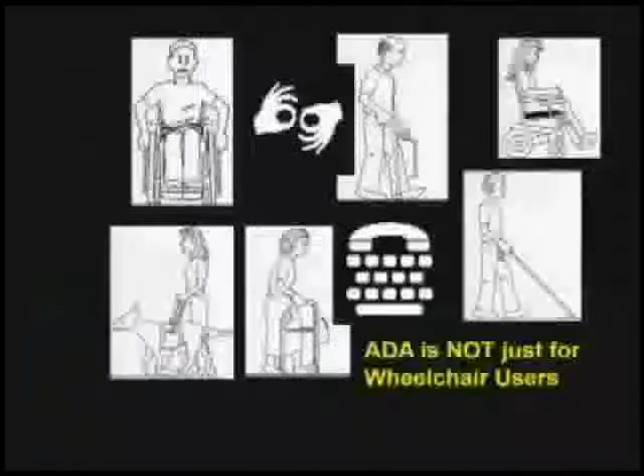The ADA is not just for wheelchair users, walkers, crutches, and canes, people who are visually impaired, hearing impaired, vertically challenged, or even those with arthritic hands. It covers all kinds of disabilities dealing with accessibility, so it's not just chair users. Chair user spaces are probably one of the bigger impacts, but again, not just that.

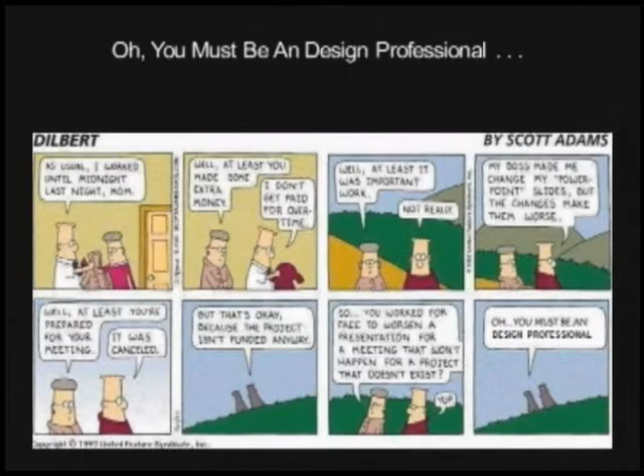Let's talk about my good friend Dilbert, talking to his mom. 'Well, as usual, I worked until midnight last night, Mom.' 'Well, at least you made some extra money.' 'I don't get paid for overtime.' 'Well, at least it was important work.' 'Not really. My boss made me change my PowerPoint slides, but the changes made them worse.' 'Well, at least you're well prepared for your meeting.' 'It was canceled. But that's okay because the project isn't funded anyways.' So you worked for free to worsen a presentation for a meeting that won't happen for a project that doesn't exist. Oh, you must be a design professional, i.e. an architect, and I know you've all worked on that project. Hopefully this presentation will help make sure this doesn't happen to you.

Now, compliance with the ADA. ADA is not the American Dental Association, even though you might Google it and find that. We're talking about the Americans with Disabilities Act.

In dealing with accessibility, one of the places you can go for technical assistance is the Access Board. Great website, a lot of good information there. They have a technical assistance number, 1-800-USA-ABLE, where you can get technical assistance.

They're only going to give you technical assistance on the ADA, not the Florida Accessibility Code. They don't know the specific details about the Florida Code and our specific challenges here in Florida, but they'll talk to you about federal requirements, which might give you good insight. Look at their website for clarification and information.

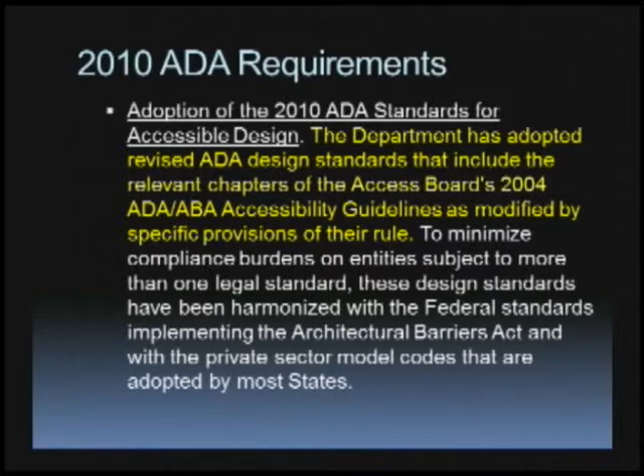ADA facility compliance affects new construction, alterations, barrier removal, facilities for existing facilities. So in dealing with that, you need to look at the requirements for the Florida Accessibility Code. The 2010 ADA requirements, the department has adopted the revised ADA design standards and added to them for accessibility. So the important part is March 15th, 2012, we have a new ADA and we also have a new Florida Accessibility Code.

This presentation is really going to be based on the requirements of the Florida Accessibility Code and their requirements. We're going to be bouncing back and forth a little bit with some things for the ADA, so you're aware of it if you're practicing outside of Florida, but we're going to be looking mainly at the Florida-specific items.

There's a new format on the 2010 ADA standards. If you've been using ANSI A117.1, you've seen that new format. In Florida, it's a totally whole new piece. So we're dealing with that. The old Florida code, like Section 464 dealing with parking, that's no longer the same. Parking is in a whole new section. So be aware, new section numbers, you're going to need to change all your references as it relates to pieces of the Florida Accessibility Code.

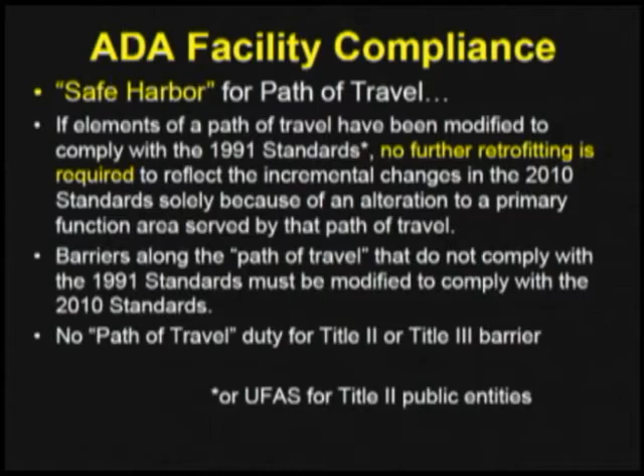Again, if you met the '91 standards, no further retrofitting is required to reflect the changes in the 2010 standards. New construction meets the ADA standards and the Florida Accessibility Code. Alterations meet the new construction standards to the maximum extent feasible, and the path of travel requirements can expand the scope of a building project.

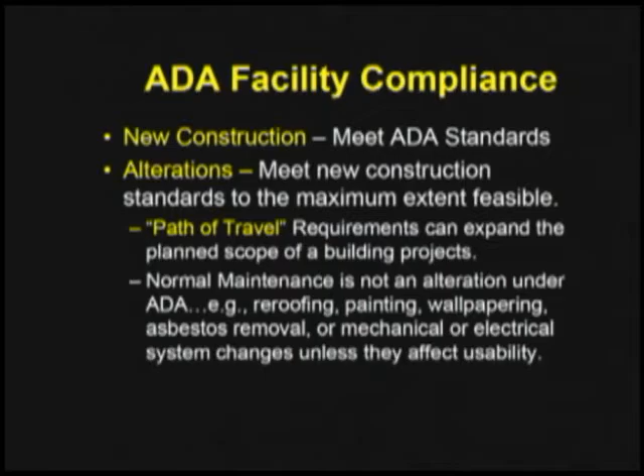The biggest issue we see all the time is people doing an alteration to a building. There's a thing called the 20% rule, and people forget that 20% of your alteration needs to be spent on accessibility compliance. So when you're doing a project in Florida, you've got to think about your alteration, and then think about what you're doing for accessibility. We'll talk more about that later.

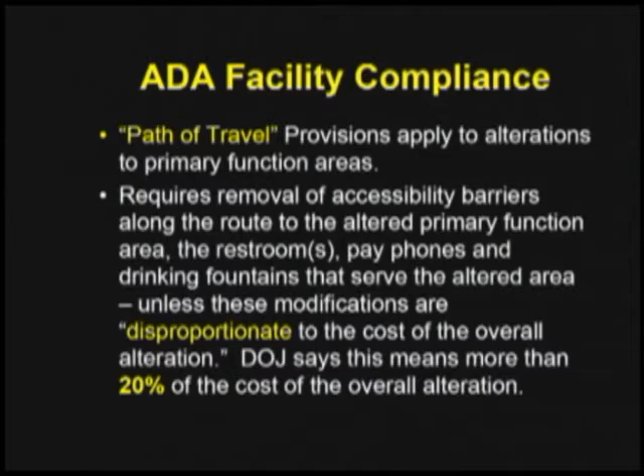The path of travel, and here's that disproportionate cost I was just talking about. DOJ says that means more than 20% of the cost of the overall alteration. So let's say your client tells you a project is going to cost $100,000. You need to tell that client, wait a minute, 20% of that needs to go toward accessibility. So maybe your project isn't $100,000, it's $80,000.

20% of 80,000 is 16,000. There's 80 and 16, that gets you to 96,000. You just saved your client $4,000. See if you can split it with them, maybe work out a deal and get some bucks out of it. But be careful about this alteration and the 20% requirement.

The path of travel is a continuous, unobstructed way of pedestrian passage by means of which the altered area may be approached, entered, and exited. This also includes, for these alterations, restrooms, payphones, and drinking fountains serving the area.

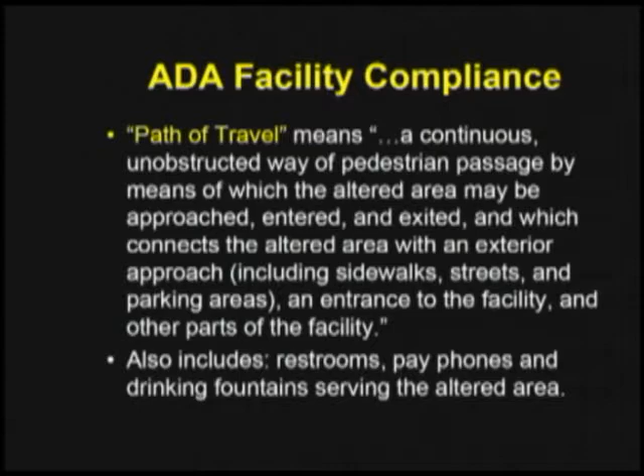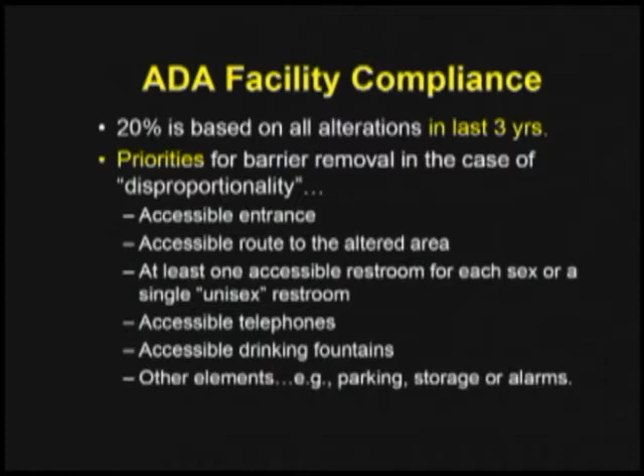20% is based on the alterations in the last 3 years. There's a recommended priority in dealing with this. Basically, look at it this way: get me into the building, provide me access to goods and services, and let me get to the bathroom. That's usually your path of choices, and that kind of makes sense. So they talk about accessible entrance, accessible route, at least one accessible restroom, then telephones, drinking fountains, and other elements. Main point: can I get into the building?

There's a declaratory statement in the state of Florida on this specific issue that says if I'm doing an alteration to a tenant space in an office building, only the tenant space is required to be made accessible. I don't start looking at the common area bathrooms. I don't look at the elevator if it's a multi-story building. I don't look at getting into the building. I just worry about the tenant space.

Landlord-tenant, very important issue. And like I said, there is a declaratory statement issued by the Florida Building Commission to address this issue and clarify it if you ever run into this problem with a building official here in Florida.

Service animal, I just had to throw this in there because I couldn't believe it. I found this interesting. Service animal basically before meant almost anything. I've actually been on a flight where a woman had a snake as her service animal. She preferred it, it made her feel comfortable. She would get a little nervous on the plane. She got nervous on this flight, so out of her bag she takes the snake and wraps it around her neck. Now the guy sitting next to her kind of freaks out.

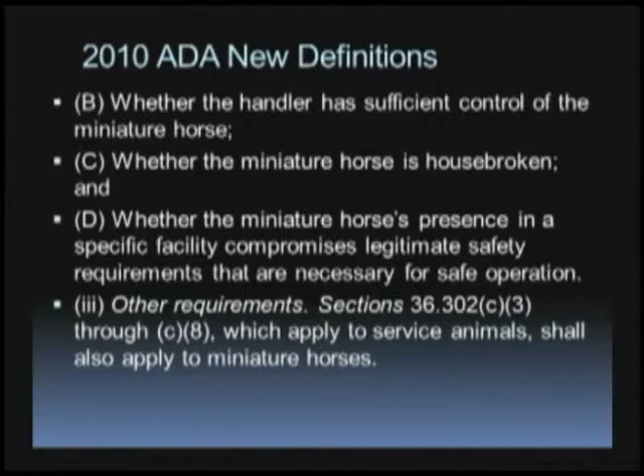Here's the Florida Accessibility Code for Building Construction. This is the binder for the book. It says 2010, but in reality it's the 2012 - this guy right here. Now, I printed this out myself, that's why you see it. But I want you to be aware of the fact that it is a 2012 Florida Accessibility Code. That's what you're dealing with. It happens to be in all the binders of the 2010 Florida Building Code.

In dealing with all of this, the 2012 requirements have some exceptions from the federal standards. There used to be about 17 items that are Florida specific, above and beyond the federal requirements. What we were able to do during the process of upgrading to the new 2012 is we dumped over half of those, and we've cleaned them out a lot. So there are certain ones that are important for the disabled community in Florida, and these are some of those.

The exterior door still stays in Florida at 8.5 pounds. Okay, that's still an issue that's still out there.

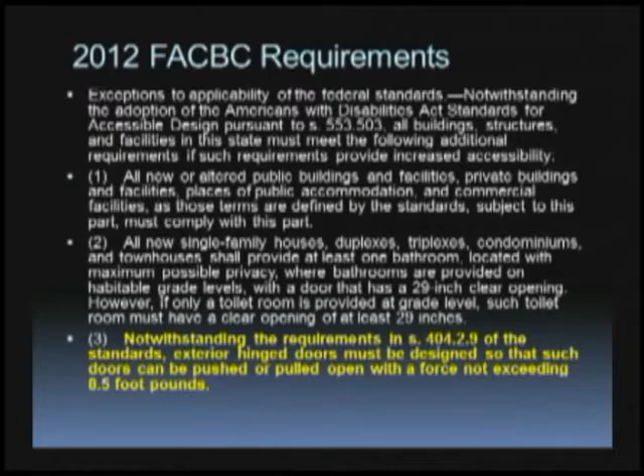In hotels and motels, the number of rooms equaling at least 5% of the guest rooms - so 5% of the guest rooms under Florida law are required to be made accessible, and these are the only 3 items that deal with those requirements: grab bars, all beds open frame, and we've changed this. It used to say a water closet that you provide a donut, which is a raised seat. The problem was you could never find it. So when we were working through this process, we agreed just put in a high toilet. So what you're going to put in is one of the accessible toilets 17 to 19 inches above the floor. And that's above and beyond the base requirement for accessible rooms.

In bathing rooms and toilet rooms, in new construction - and this is really important to know - in new construction you are required to put a lavatory in the accessible toilet stall. It's not required under an alteration because the law specifically says new construction. So you've got to put that lav in the stall.

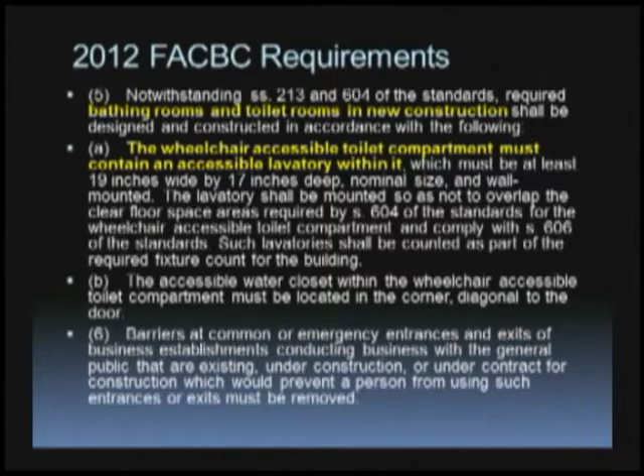The other part to let you know: when you weed through the Florida Accessibility Code, you'll see if there's more than one fixture in the accessible toilet stall, you need to have one accessible fixture out in the common area. Guess what that means? You will be providing an accessible lavatory in the common area. Now most plumbers and installers are starting to make all the lavs at 34 inches, so it's not a big deal, but it's your apron - you got to be careful about your apron in the common area. So be aware of that one coming up.

The toilet also needs to be diagonally across from you. Can't put it in front of the door unless you've got a really big room. But if you take a typical stall that you're going to create, it needs to be diagonally across so you can get in there and maneuver around. Another important part dealing with that, because there are 2 fixtures in the accessible toilet stall, the code now says you need a 5-foot turnaround inside that stall. So just be careful, that can catch you if you're not careful with it.

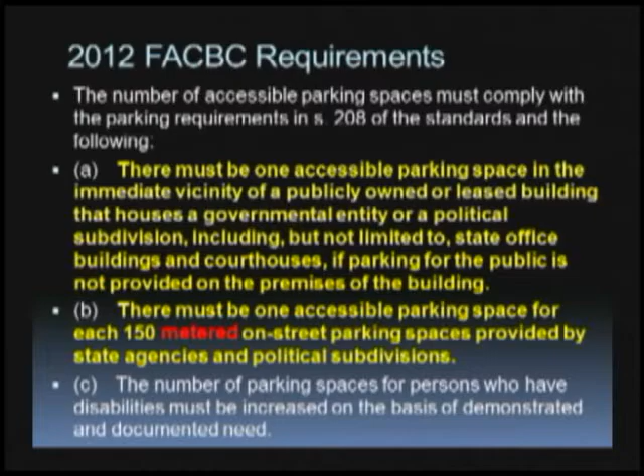There must be one accessible parking space in the immediate vicinity of a publicly owned or leased building, and one accessible parking space for each 150 metered on-street parking spots.

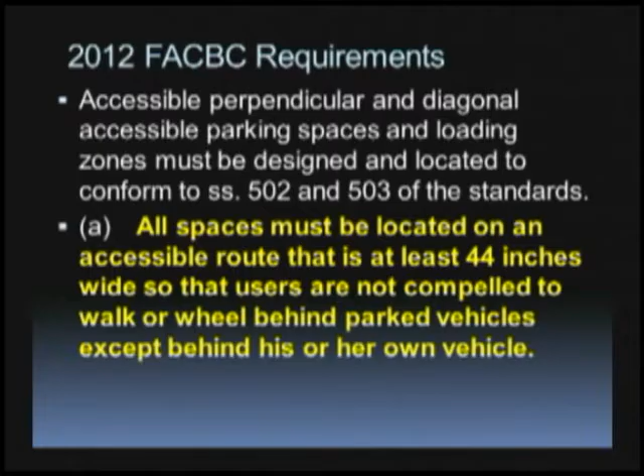All spaces must be located on an accessible route at least 44 inches wide so users aren't compelled to walk or wheel behind parked vehicles. We added text saying except behind his or her own vehicle. There was always a debate, but we all knew it meant you can go behind your own car, but not behind another person's car. We tried to get two cars done in the process, but it didn't work out, so this was the compromise.

So basically, from the parking space to the front door, you need a 44-inch path to travel, an accessible route that's at least 44 inches wide. That's what you're going to have to be doing here in Florida.

Florida's parking spaces are a minimum of 12 feet wide, and you need a 5-foot access aisle. You don't need the van accessible parking sign in Florida for accessible parking spaces that are open, because guess what, they're all van accessible. What's a van spot under the ADA? 11 and 5, 16 feet. What's Florida's? 12 and 5, 17. Therefore, they're all van accessible, and there's no requirement to provide the van sign because they're all going to be accessible.

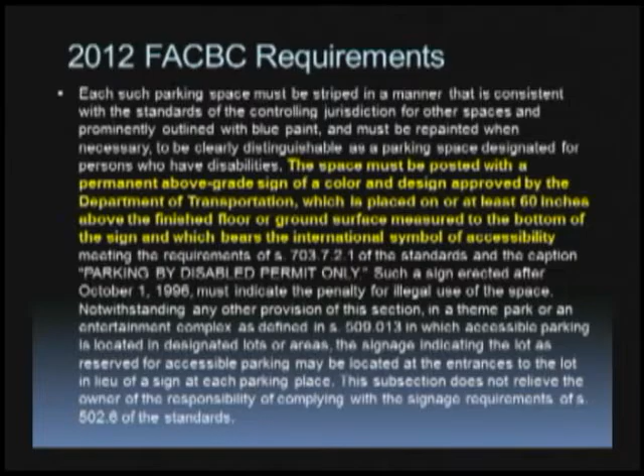The space must be posted with a permanent above-grade sign. Florida's code used to say 84 inches, but we've changed it to harmonize with federal law. It's now 60 inches minimum to the bottom of the sign. One of the processes in eliminating a lot of these things in the Florida statute was trying to harmonize the Florida Accessibility Code with the federal requirements.

The removal of architectural barriers from a parking facility in accordance with 28 CFR must comply with this section unless compliance would cause the barrier removal to not be readily achievable. So we put that in dealing with parking, because you're dealing with existing facilities and might have a problem getting things to work out. Sometimes that means you do what's readily achievable.

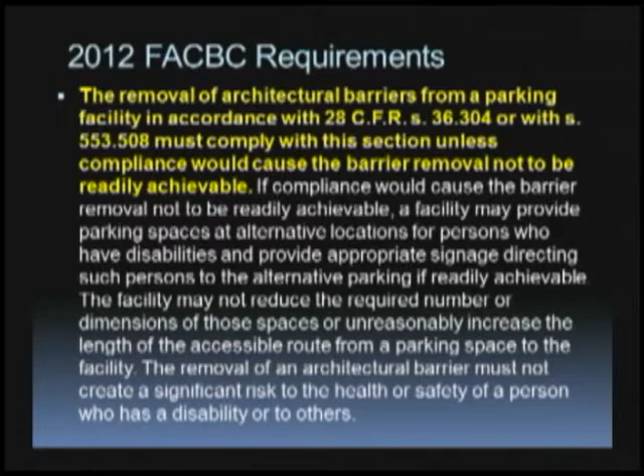An example I can give you is parking close by might have too much slope, but if you go across the driveway, it could be flat. Now I've provided accessible parking. It's not right by the building, but that's a readily achievable solution versus tearing up a parking lot.

A facility making alterations under 553.507, part of the Florida statute, must comply with this section to the maximum extent feasible. In other words, when dealing with alterations, you're doing the best you can. That's right from the statute.

If a local jurisdiction says, okay, we like our parking spots 15 feet wide with a 6-foot access aisle, wrong answer, because the statute expressly preempts the establishment of handicap accessibility standards to the state and supersedes any county or municipal ordinance. So the Florida Accessibility Code is a mini-maxi code. No local jurisdiction can add to it, and no local jurisdiction can take away from it.

Some people might say they want certain things a particular way in their area. No, Florida Statute 553.513 says this is it. This is all you do.

This was a part that has already passed, we've already dealt with it, so we won't get into it. But basically it was saying you could use the 2010 ADA until March 15th if you wanted to do that for a project.

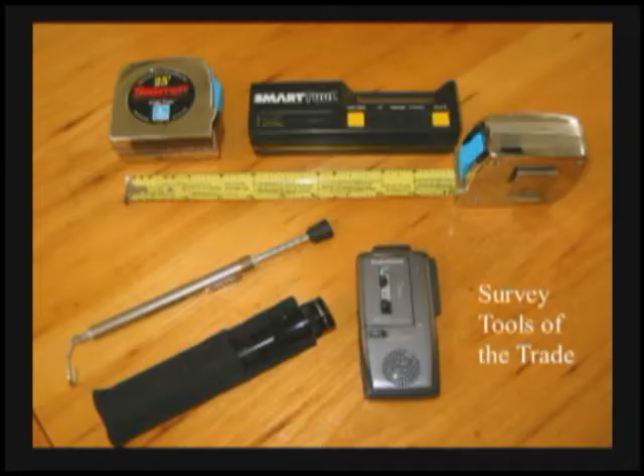Tools of the trade, some basic things. There's an ADA tape measure out there that has the entire accessibility code on the tape, if you want to get one of those and have lots of fun. I stole from the old school - I've upgraded this, I no longer do tapes on the micro cassettes because you can't buy them anymore, so I've now gone to a digital recorder. It's interesting, I went to replace the tapes and they said no, nobody sells them anymore. They're still out there, but you got to find them.

And the smart tool, which is the leveling device, take a look at it. So things you need to do if you're dealing with accessibility: you need a tape measure at least 25 feet long, so you can measure the parking spots. The leveling device, the smart tool, buy the 24-inch one - that's what the feds use, that's what everyone, all the documents they publish, say buy the 24-inch one, calibrate it, and set it up.

The crazy part - I've actually had people dealing with this, and I want you to know it solves the debate in the field real quick. I've actually had a person do this to me: gone out to the field, kind of rocked back and forth, and said, this feels about 6.7%. How do you do that? You got something on your ankles? Take the smart tool, it's out there, it's done.

The door pressure gauge, the last time I looked at it, the price was 30 bucks. That's for pushing and pulling on a door. It's the best one out there that I know of. A lot of people use fish scales and stuff like that, and obviously a digital camera - take pictures. With today's technology, pictures are the best thing, you can see everything you need to know.

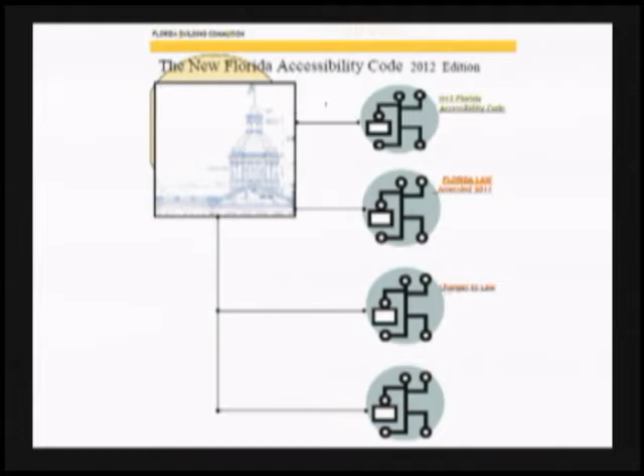This is the web page, if you go to floridabuilding.org - www.floridabuilding.org - this is the web page that you get to, and if you notice it says 2012 Florida Accessibility Code, Florida law, the amended law, and they have a little paragraph in there about the changes in the law. Some good information for you if you want to go looking at that.

The equivalent facilitation - there's still a part in there that you can say, what's equivalent? Nothing in these requirements prevents the usage of designs, products, or technologies as alternatives to design, which is what the building codes always had - alternate design solutions. So you can go to that.

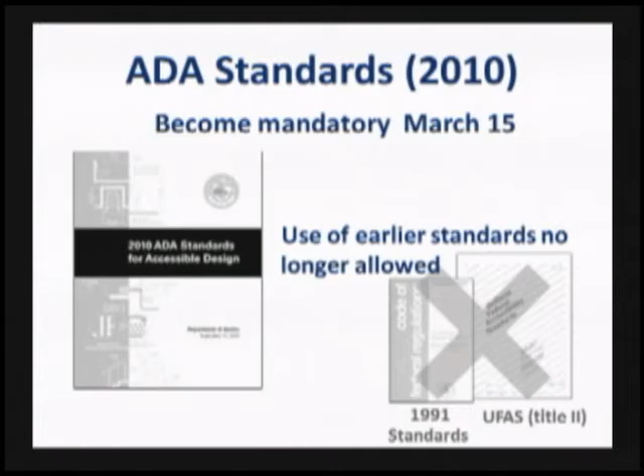Let's take a look at specific things in the Florida Accessibility Code dealing with it. Again, we talked about it - we got the old books that came out, we got the 2010 ADA standards, which is the basis of the Florida Accessibility Code, and it all became effective March 15th. So dealing with that, you're dealing with the building permit date. Here we are at this point in time, we're already past that date, so everything should be dealing with that code section.

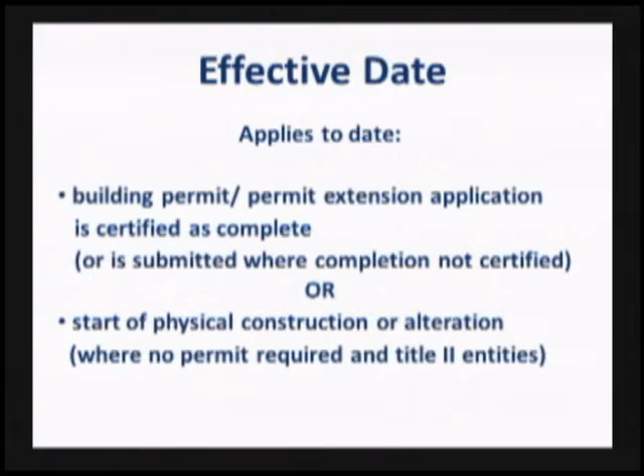The additional DOJ added requirements to the 2004 Access Board's guidelines: social service center establishments, housing at places of education, assembly areas, medical care, residential dwelling that's covered by the ADA, detention and correction facilities - so those of you who do get incarcerated, you will know you will have an accessible stall and cell to be in if you want to get there. And they've clarified some things about places of lodging.

The ADA standards are for DOT. DOT has done their own standards - they've taken the federal ones and they've added to it. As an example, under the new Florida Accessibility Code, there is no requirement for detectable warnings. They're gone.

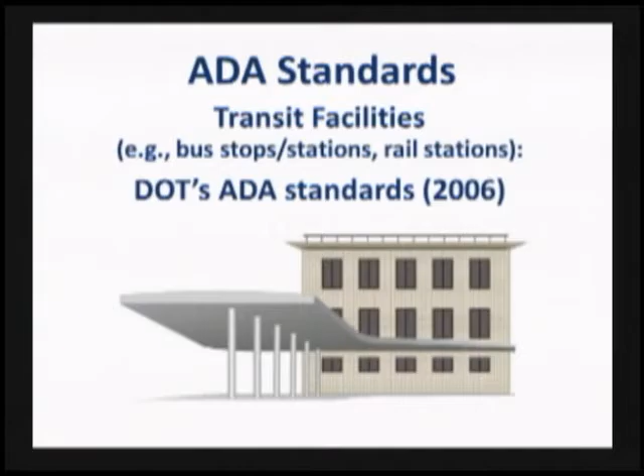Detectable warnings are now gone on private property. Folks, we've been putting them up all over the place, in places they should not be. DOT has said you will provide detectable warnings on roadways and streets. But once you turn off the road and go onto the property, guess what? No more detectable warnings.

As we mentioned earlier, the harmonization between the International Building Code and ANSI, keep going. We're obviously into a newer version of the International Building Code, and that's coming up with the newer versions of the ANSI standards. There is a side-by-side comparison, if anyone was curious, with the new ADA, the DOJ, and the IBC. If you want to download this, I promise you, if you start reading it, it's a good thing to help put you to sleep. We'll put you right out real quick.

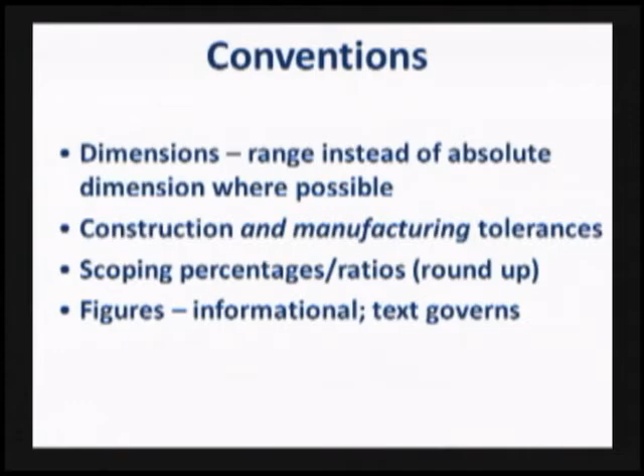Let's talk about some of the things in Chapter 1. Dimensions, there's a range now. Our famous one was the toilet, 18 inches off the wall. Guess what, that's now gone to a range, 16 to 18. So you're going to make your toilets off the side wall at 17 inches now. Just dimension it at 17, therefore you've already put it in the middle. You've taken care of that. There's construction and manufacturing tolerances in there, and the figures are basically informational. The text rules what's going on here.

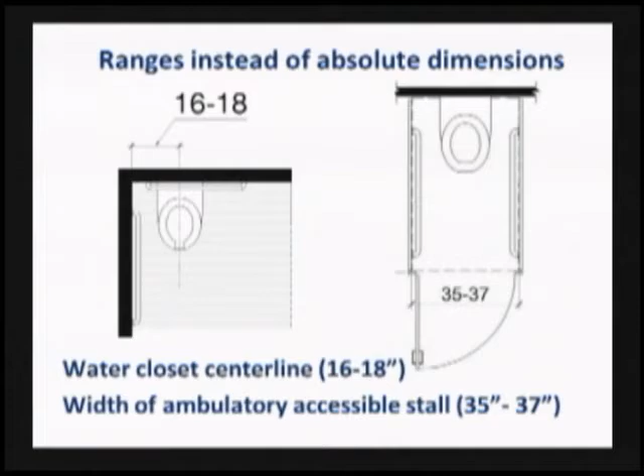So here's a range, as I said, the toilet is now 16 to 18 inches. The ambulatory stall, okay, for the walkers, crutches, and canes, had to be 36 inches. It's now 35 to 37. They've got a range. So everything has gone into ranges, which makes this easier as a designer. You pick the middle one in the middle and you got it covered.

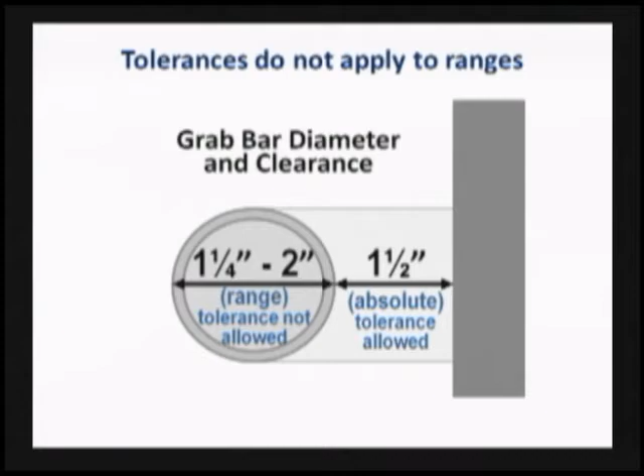Grab bars. It always was 1.5 inches, and they wrote an opinion way back in 1994 that says 2 inch, 1.5 inches nominal, which is really 1.9 inches. So they've clarified that, but that distance off the wall for a grab bar is 1.5 inches. Not handrails, grab bars, different animal.

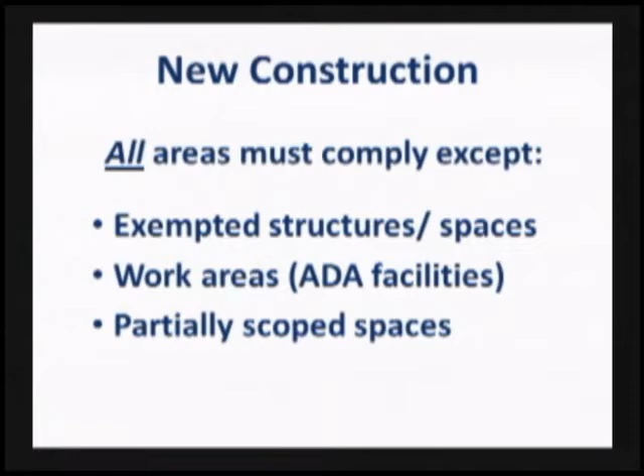Okay, let's talk about some things in Chapter 2. New construction, all areas must comply except exempted structures, work areas, and partially scoped spaces. As an example, a medical care suite, the mechanical room is exempt. Just approach, enter, and exit.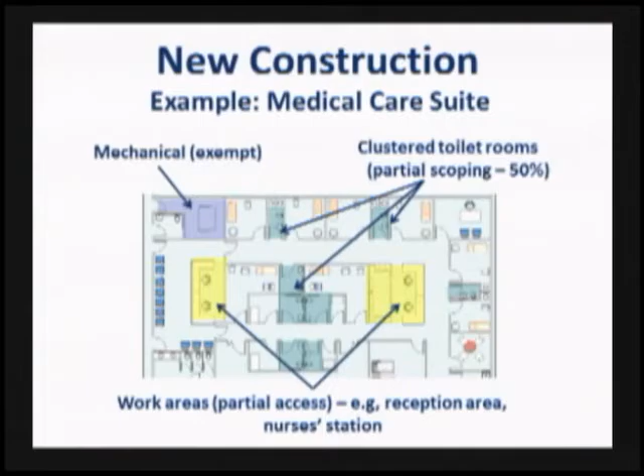Clustering, big change in the code. Some general exceptions are construction sites, some raised areas, like an airport traffic control tower, that's exempt. Things like that. Single occupant structures, toll booths. In Florida, we do have toll booths in the Northeast. You got the toll booths where you walk down below and pop up. Well, you don't need to make those accessible.

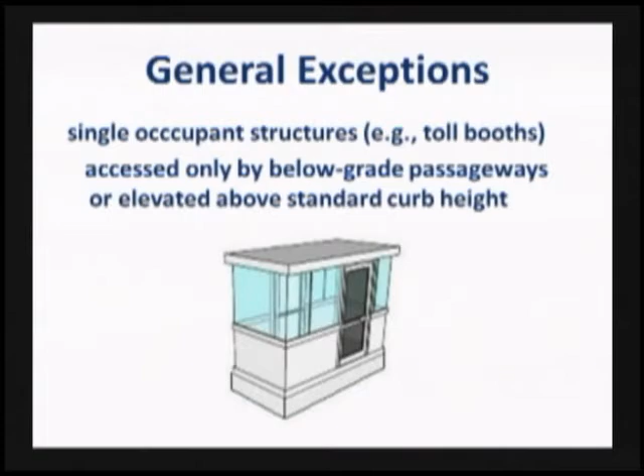Those of you who like to watch wrestling, there were some people concerned about, does a wrestling ring have to be made accessible? Guess what, it's exempt. So you're not going to see some interesting wrestling, but if you want to watch it, raised boxing and wrestling rings are exempt.

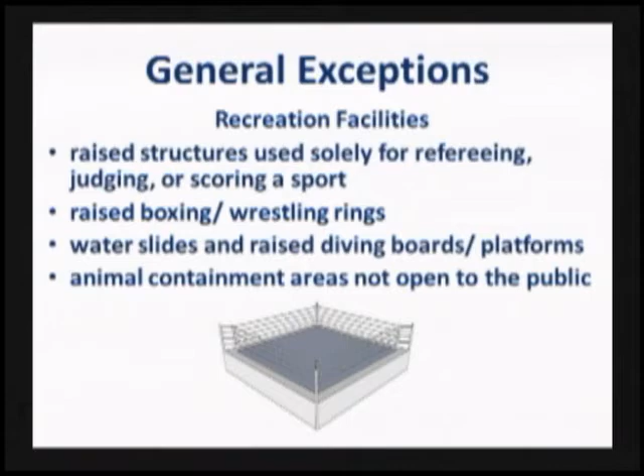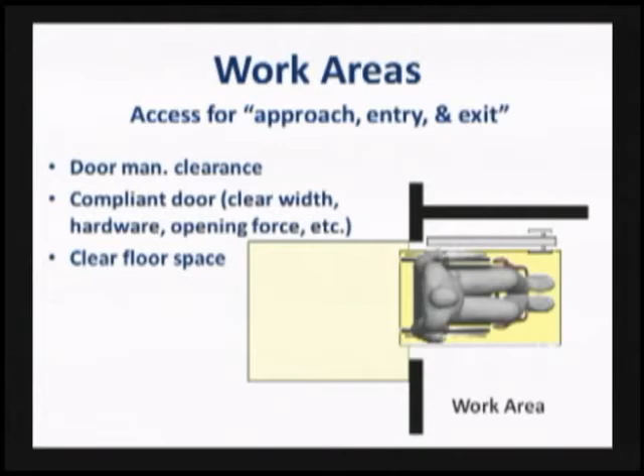Minimum requirements for work areas: approach, enter, and exit. Can I come to the front door? Can I approach it? Can I enter it? And can I exit? Which means I can just get right in. That's what this slide is telling you. Can I approach it, enter it, exit? That's it. That's all I need for a work area, for accessibility.

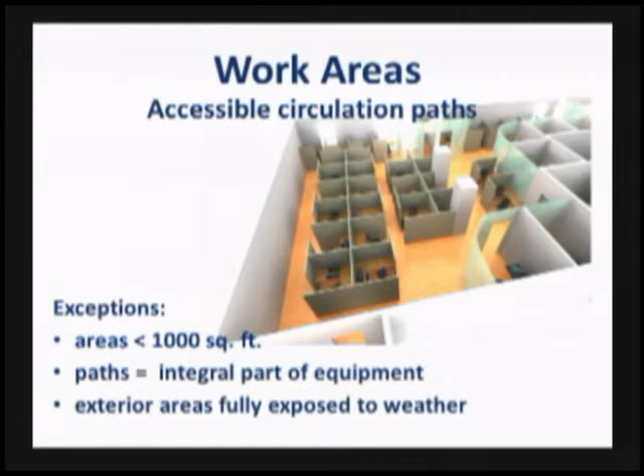Circulation paths. There are some exceptions. Under areas under 1,000 square feet, the path of travel is different. Paths equal the integral part of the equipment, getting around the office space. So when I do this open office plan, accessible path of travel deals with that. Areas under 300 square feet that are elevated at least 7 inches as an essential function condition of the space, they're excluded, except for courtroom stations. Courtrooms, you need to make those accessible. So there's certain work areas that are exempt.

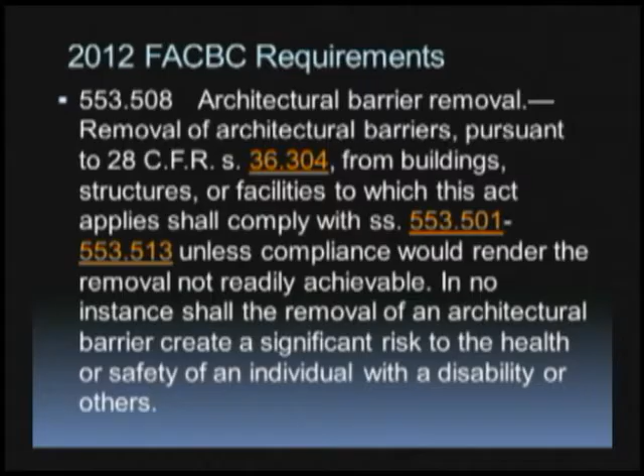In dealing with alterations, Florida law says architectural barrier removal under 36304 from buildings or facilities shall comply with the requirements of the law unless compliance would not be readily achievable. So be aware of Florida specific requirements. It kind of kicks you back to the federal requirements.

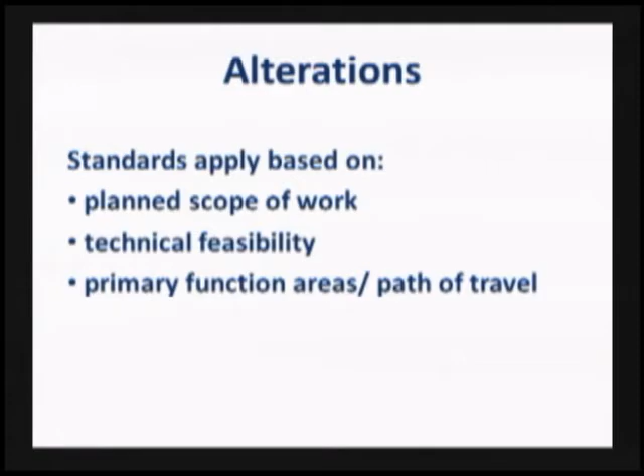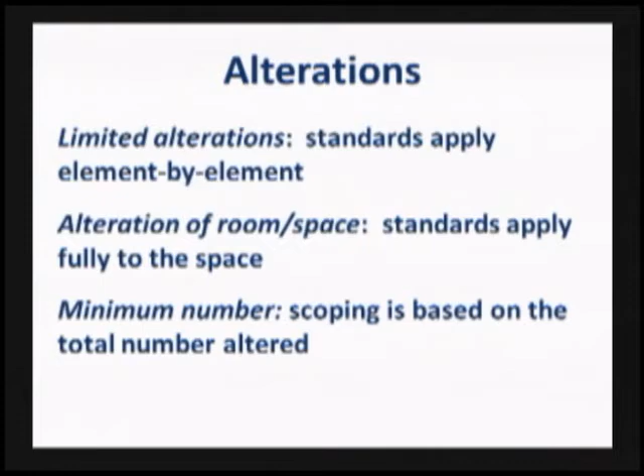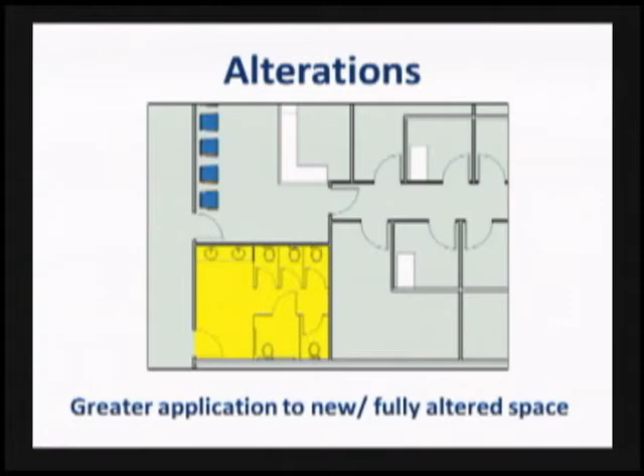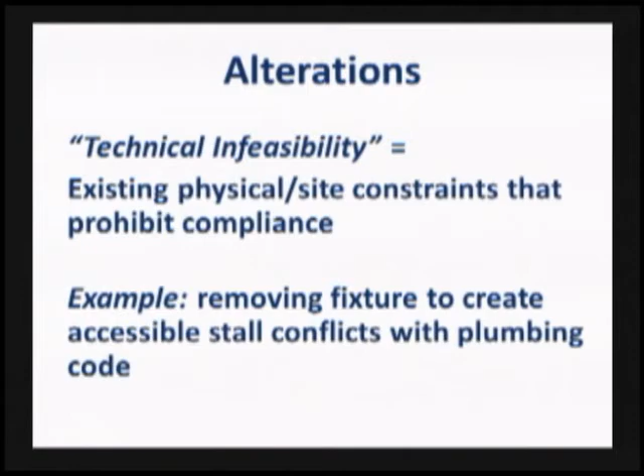Under the alterations, you apply standards based upon the planned scope of the work, technical feasibility, and primary function areas. There's limited alterations, standards apply element by element, so you're taking a look at that. So when you're doing an alteration, you've got to take a look at that and your famous 20% rule. As an example, here's an alteration. Standards apply to those things being altered - the mirror, toilet, grab bars, something like that. If I'm doing the whole space, then I'm taking a look at what needs to be done for accessibility under alterations. There's a part that's technically infeasible under an alteration. So if I'm into a space and I can't really do it, maybe some column structural elements or something like that, that now defines it as technically infeasible.

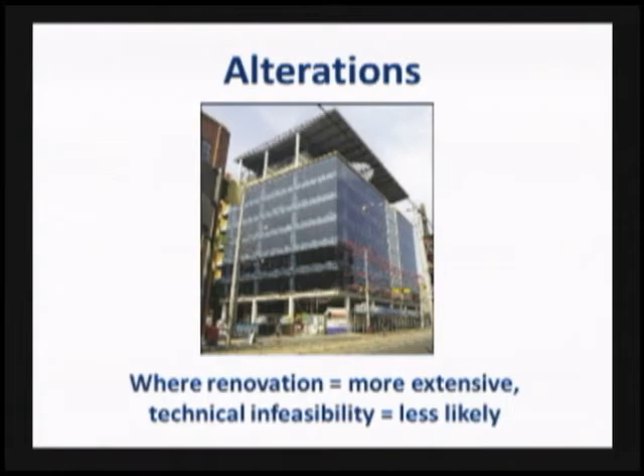Here's some limitations of space. Okay, I've got some stuff, but I got a minimum means of egress to get out here. So I've got to be careful to make sure I can't get too big, because now I'm going to have a problem using my accessible path of travel. Where renovation equals more extensive, technically infeasible equals less likely. If you're spending a lot of dollars, the technical infeasibility kind of starts dropping down the food chain. So alterations is a case-by-case determination based on existing constraints and the compliance requirements to the maximum extent feasible.

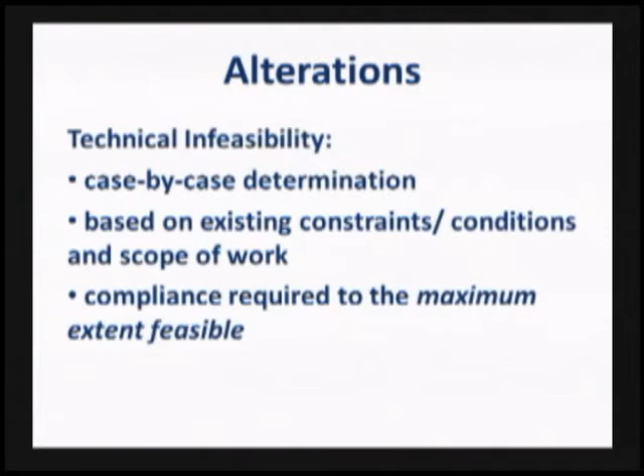Additional requirements for alterations to areas containing a primary function. Okay, let's take a classroom, a school like that. Office building, a bank - what's the primary function of the bank? Going into the bank area to the tellers. So I got the tellers, the lobby area, the check writing things. If you're altering a bank, you need to make those things accessible.

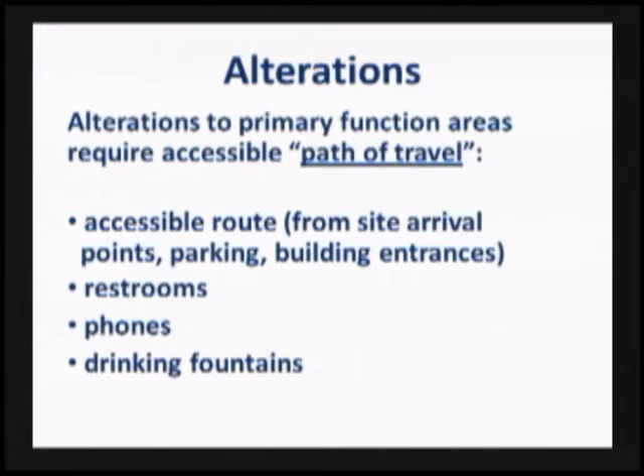Path of travel, the accessible route from the street, points, restrooms, phones, drinking fountains. Again, we talked about that a little bit earlier about this path of travel. So I'm coming in here from the street, coming in, getting to access the building, getting to my primary function of this facility.

Compliance requirements except where disproportionate to the project cost more than that 20%. There's that 20% number again. That's where the feds, as you saw earlier in the presentation, deal with up to 20%. That's all you're required to be spending when you do that alteration.

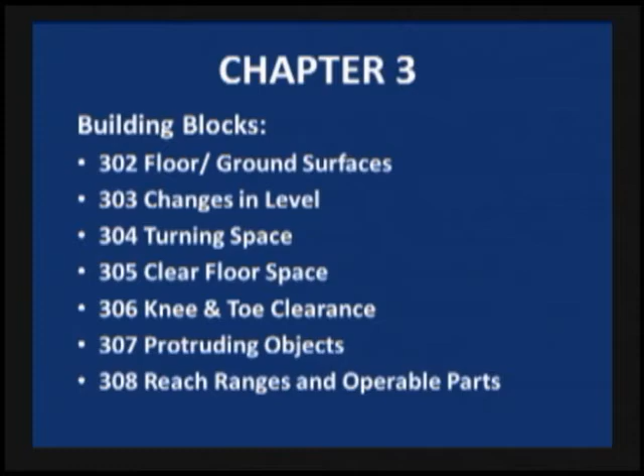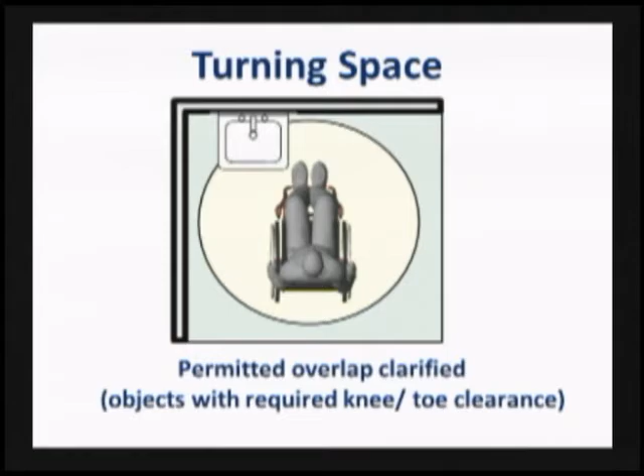The building blocks. Now in chapter 3, what they did is they took all the things that you basically have to do for something, and the intent was to say it only once for an issue versus bouncing all around and saying it 3 or 4 times. A turning space - they've clarified that. The turning space in a toilet room can overlap the lavatory. Okay, you can swing underneath it. It does work.

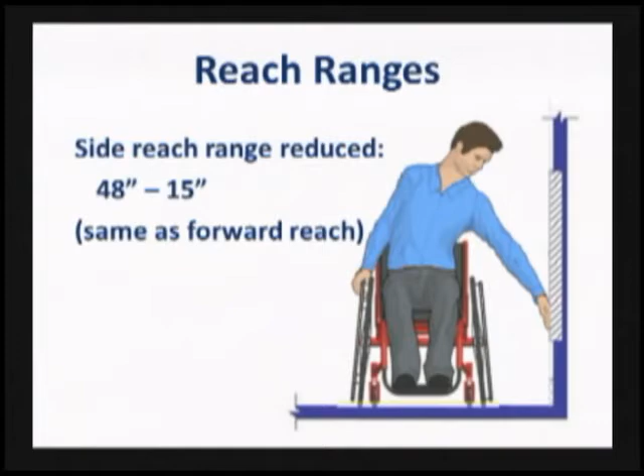The reach ranges. The side reaches we talked about went from 54 down to 48. So that's the magic number. Just think about just doing everything now at 48 inches high. Same as a forward. Operable parts - are operable parts accessible? And are they within the reach range? Here we are, fire extinguisher cabinet. That's an operable part. A person can open the fire extinguisher, so that means that pull can be no higher than 48 inches to get to it.

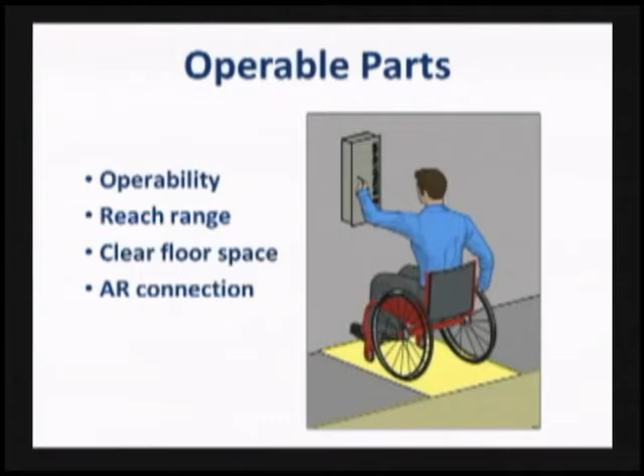Clear floor space underneath it. This got changed. If you remember, under lavatories, you had to have a 29-inch clear opening underneath it from the ground to the bottom of the apron. But a table was 27. Everyone kept asking why there's a 2-inch difference. Guess what? Now everything is 27 inches to the bottom going underneath it.

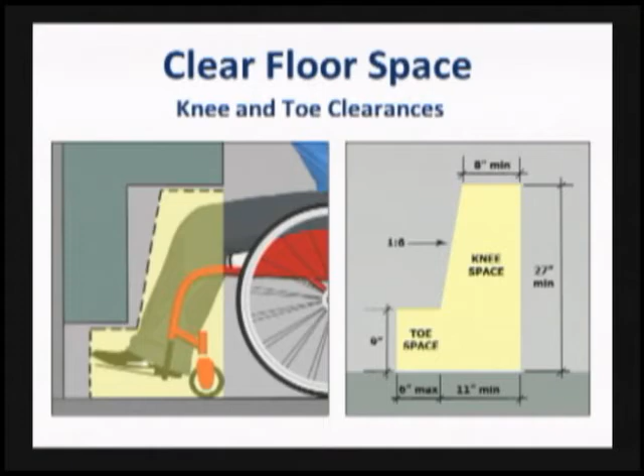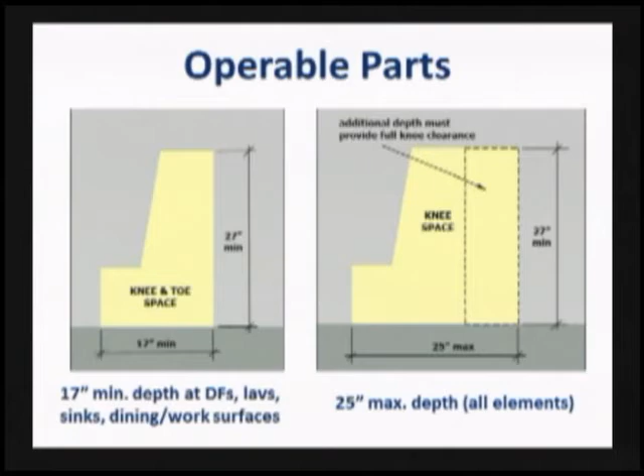Protruding objects, still the same rules: 4 inches maximum off a wall, 80 inches to the top.

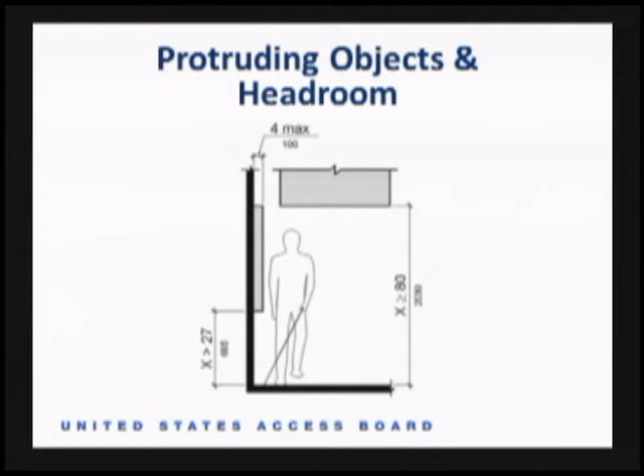This is where we tend to see a lot of challenges. People tend to forget about the stairs. Now, you put a handrail underneath there, what do most people wind up doing? They do the handrail at 36 inches. Now the handrail becomes a protruding object, so you want to drop that railing down. Because for the person with a cane, the magic number they determined is 27 inches maximum, and that's where you want to put it. My recommendation: don't get hung up on 27, drop it down to 24. Because the guy core drilling the slab or putting the handrails in might not put them down far enough. If you're not down far enough, you're non-compliant. You put them down at 24, you've already built in a tolerance.

We are still putting up fire extinguisher cabinets on the wall. They are normally a protruding object because they're 5 inches deep. Recess them in or put them in the corners.

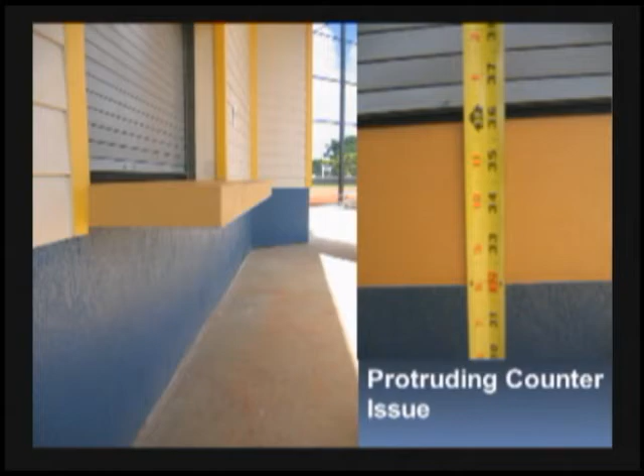Here's a facility that's got a shelf. This happens to be at a clubhouse at a government entity with a whole bunch of baseball fields - this is a concession stand. Where's the top of this thing? It's at 36 inches, so that's good. The bottom's at 28, but that shelf looks a little deeper than 4 inches, doesn't it? That's a protruding object. That's going to hurt you.

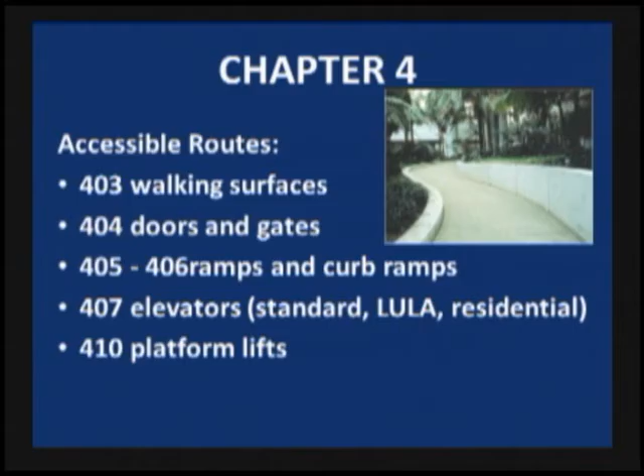Chapter 4, accessible routes, walking surfaces. You need at least one accessible route from the property line, street, sidewalk, to the front door. So you've got to get yourself there. You need it from transportation stops, from parking, and the accessible route is from the accessible parking, because that's part of your accessible elements. And a passenger loading zone if you happen to have one.

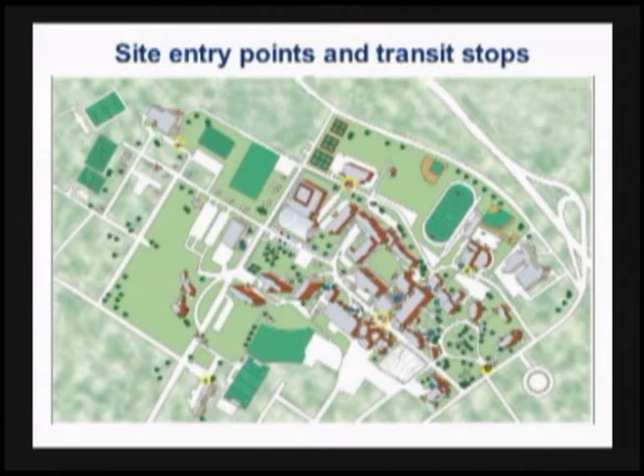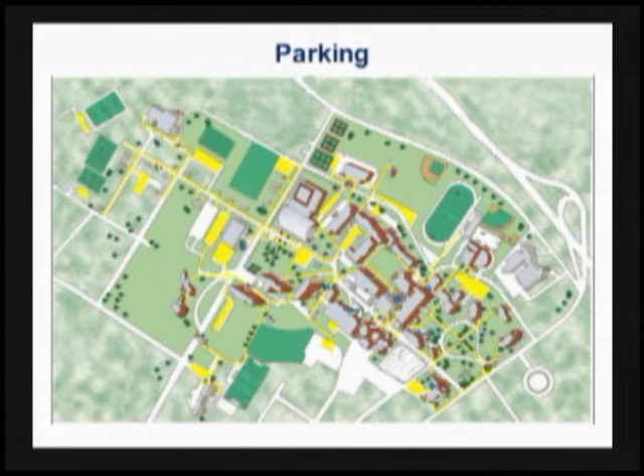So let's take a look at this giant site plan here. I don't know if you saw the change on that. Let's go back. There it is. Now I've drawn all my accessible routes to get me through this campus. So in a college campus, this can get really kind of crazy for you. I've got parking, the accessible route from the parking, and dealing with it.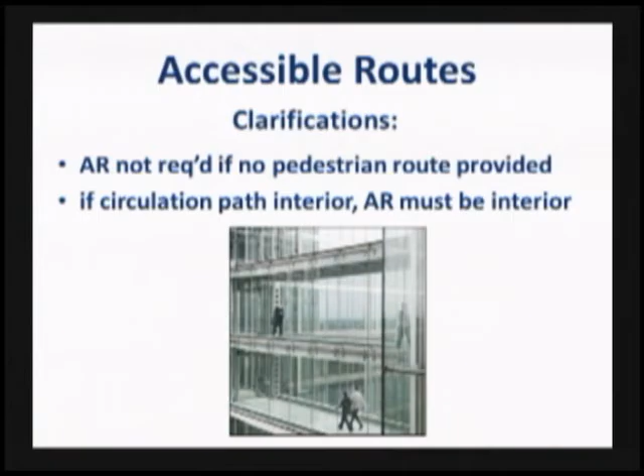Accessible routes are not required if no pedestrian route is provided. If the circulation path is interior, the accessible route must be interior. In other words, I looked at a facility and did a review of one. They had a stage on the back of the building. They couldn't have access to the stage, so they made the accessible route to the stage outside the building, and then you got up to the stage. Can't do that. You've got to use the same accessible route that everybody else goes. Can't go outside and go a different way.

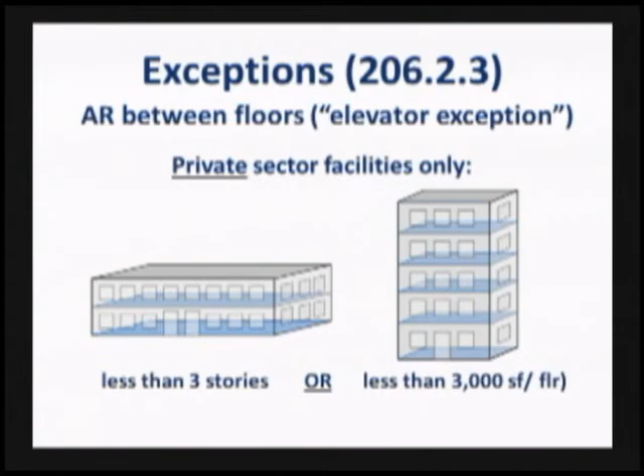Accessible routes are not required to mezzanines in buildings not required to have an elevator. That's an ADA issue. Under Florida law, you are required to have vertical accessibility to every level. New construction, you will provide vertical access to that mezzanine. Under federal law, any building that's less than 3 stories or less than 3,000 square feet is not required to provide vertical accessibility. Not in Florida. In Florida, again, every level. And a level in Florida is defined as anything greater than 1/2 inch. Take a look at that.

So there are some exceptions under the federal requirements, but as I mentioned, the accessible route requires upper story access if you've got a medical facility, you've got to do it. And again, just in Florida, more than 1 story, mezzanine, any raised areas, you're going to need to provide an accessible route to it.

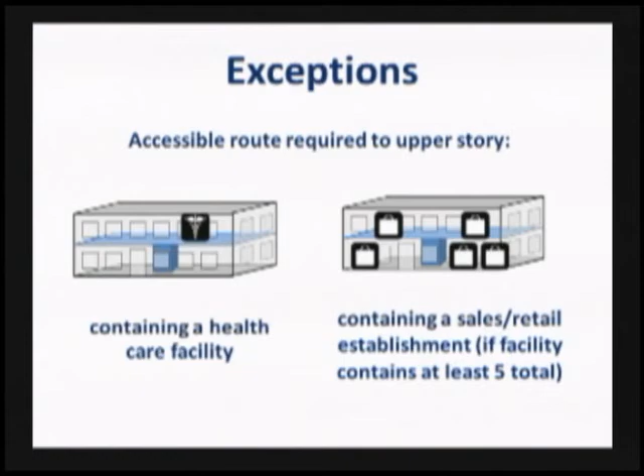Yes, Larry? The churches have traditionally been exempt from this. How are they covered under the new code?

The question was, churches in Florida, what's the requirement for accessibility for churches in Florida? Under federal law, churches are exempt from accessibility compliance. There's an Attorney General's opinion that was put out a couple of years ago that clarifies the issue, that churches are exempt from the Florida Accessibility Code. Now, are you going to find the word churches exempt in the Florida Accessibility Code? No. Here's what the piece was: the Florida Accessibility Code used to say churches and private clubs are required to be accessible.

When the battle came up about churches, and it finally came to a head, someone said enough is enough because we couldn't agree on what to do for a church. What happened was the statutory language struck 2 words: 'churches and.' So you can go to the old code and see 'churches and private clubs,' and then you'll find the word 'churches and' got struck, so now it just says private clubs need to be made accessible in Florida.

So basically, a church facility - what it's been interpreted is the house of worship is not required to be made accessible. There's an Attorney General's opinion on the webpage for the Attorney General, and at the Florida Building Commission, under their webpage on accessibility, they show the same document. So hopefully that will help you out a little bit.

The vertical accessibility - this is the big hot button in the state of Florida, always has been and always will be. Florida Statute 553.509 mandates you have vertical accessibility. Unoccupiable spaces such as rooms, enclosed spaces, and storage spaces that are not designed for human occupancy, for public accommodations, or for work are exempt - i.e. a warehouse, you got a second floor in a warehouse or a mezzanine that is strictly storage, that's exempt from vertical accessibility. Occupiable spaces and rooms that are not open to the public and that house no more than 5 persons, including but not limited to equipment control rooms and projection booths.

Now, 5 people or less, not open to the public, but the important part is this has nothing to do when you go back to chapter 10 and 4 and figure out occupancy. So it doesn't mean a business occupancy where the building code says body count is 1 per 100. It doesn't mean 500 square feet. The law just says 5 people - not going back to occupancy count.

That's an important part. Now, we recommend if you have a building department or a jurisdiction that maybe has heartburn about this, talk to your client, have them sign an affidavit and give it to the building department. Then they've got something hopefully in their folder to answer that question.

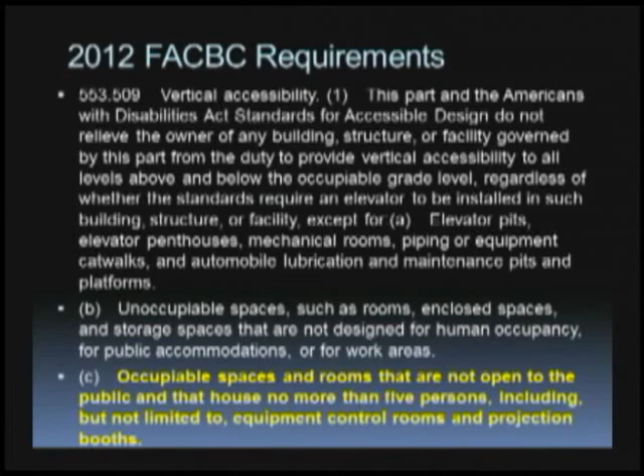These are the ones that got added to the vertical accessibility: theaters, concert halls, and stadiums or other large assembly areas that have stadium-style seating or tiered seating if sections 221 and 802 of the standards are met. You used to have vertical accessibility meaning every level of a stadium, every level of stadium-style seating in a movie theater, and you had to go for a waiver. 99.9% of those waivers were granted. So now all you do is follow what the code says. The federal law and the Florida law are exactly the same as it relates to the seating dispersion, and if you do that, you've met that requirement.

All play and recreational areas, if the requirements of Chapter 10 of the standards are met. There have been some jurisdictions in Florida that mandated the top of a swimming pool dive platform be accessible. Under Chapter 10, you don't have to do that.

All employee areas are exempted as in 203.9 of the standards. Those employee areas under Section 203.9 are exemptions, and all facilities, sites, and spaces exempted by 203 of the standards—everything under 203—those exceptions are now part of the exception of the Florida Accessibility Code.

Except, if you noticed, the press boxes are Section 206. We missed that, in all honesty. Somehow we missed that section, and we're trying to get that corrected.

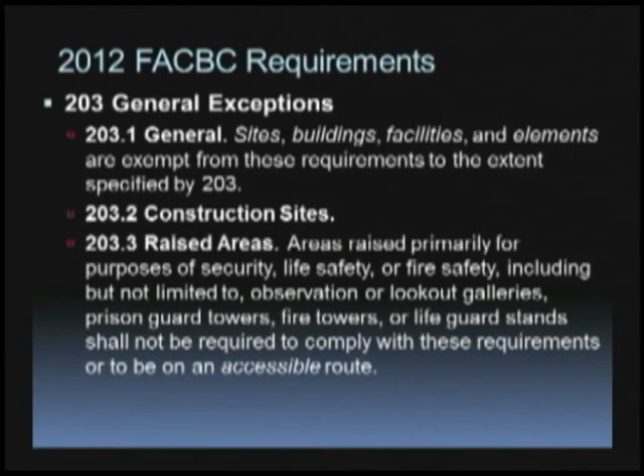Here's the general exceptions under 203: raised areas, primarily for purposes of security, life safety, or fire safety, including but not limited to observation or lookout galleries, prison guard towers, fire towers, lifeguard stands, things like that. That's part of it—limited access spaces, machinery spaces, single occupant structures.

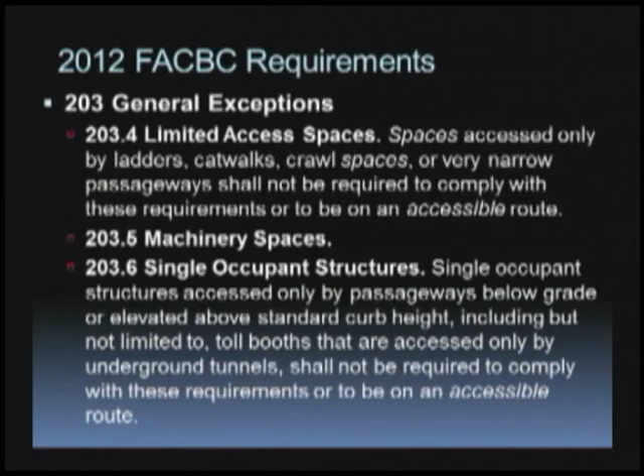Just go through yourself and look at Section 203 and dealing with things that are out there—detention, employee work areas, it's all kind of covered. Raised areas, water slides, animal containment areas, boxing and wrestling, diving boards, diving platforms. All those are now exempt from Florida's mandated vertical accessibility.

Accessible means of egress is referenced into the ANSI standard, the International Building Code. It actually references the 2003 Section 207. Here's the section under the older version.

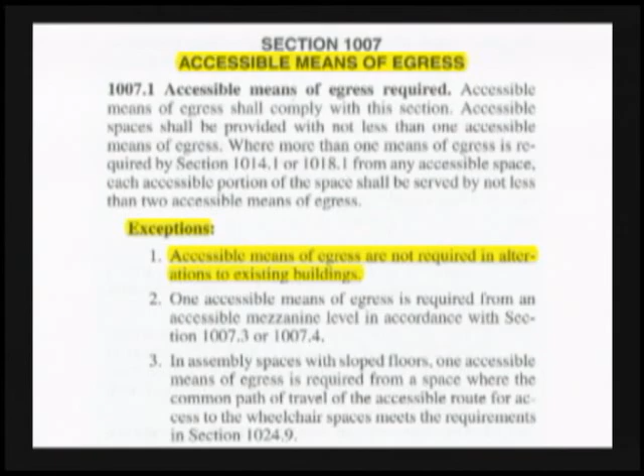There are 2 choices you can pick, but Section 1007, accessible means of egress, the exception—this is for existing facilities. Accessible means of egress are not required in alterations to existing buildings. So part of the Florida Accessibility Code takes you back to that. You need to have the old codes in your hand if you can get one.

However, Florida says this: barriers at common or emergency entrances and exits of business establishments conducting business with the general public that are existing, under construction, or under contract for construction, which prevent a person from using such entrances or exits shall be removed. I just want you to be aware of that. This requirement is under the Florida Accessibility Code.

Entrances—the old code used to say half of the entrances need to be made accessible. Guess what? They now kicked it up to 60%. So now 60% of your entrances must comply. In addition to entrances required by 204, at least 60%—this is Section 206.4.1 under the Florida Accessibility Code. So you've got that dealing with it.

Clear width, path of travel for you when you walk around is 36 inches wide. You're allowed to narrow it down to 32, like going down through a door. So you're allowed to have some projections in here because some people argue that a panic bar on a door was a projection and didn't let you through. So they've clarified a lot of these little things. You can have hardware between 34 and 48 inches, no projections below 34 inches, so you can wheel yourself through for those who are chair users.

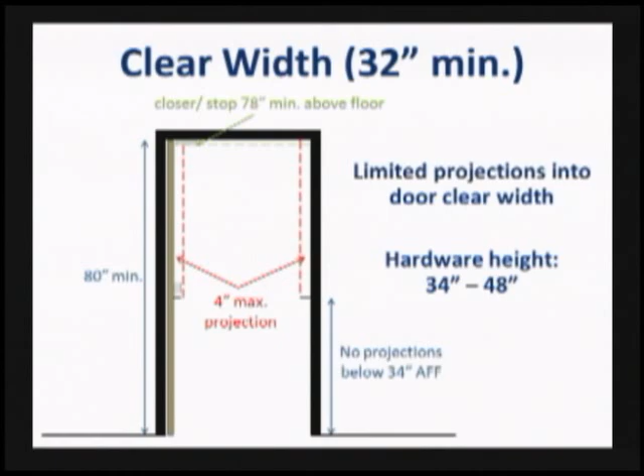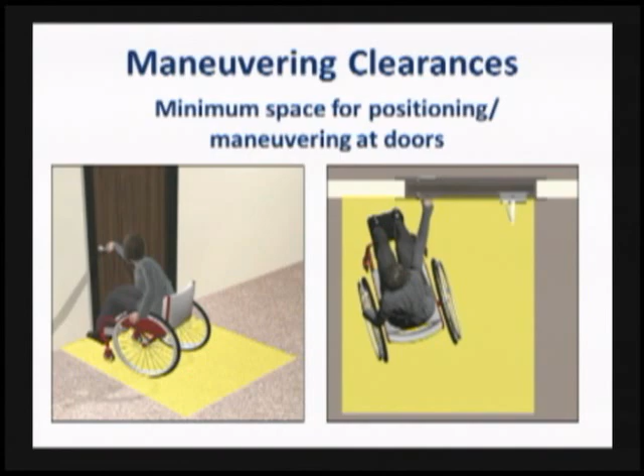Maneuvering spaces at the doors, they clarify. Look at the pictures, it's going to help you out a lot. But the pictures are just telling you what the text says—the text overrides what it really does. So in dealing with all of that, the forward approach, you got to watch where your arrows are going.

You need 18 inches clear on the pull side. If you're on the push side, you need 12 inches if the door has a closer and a latch; otherwise, it's 0. Think about a bathroom door that you normally just push open—you got a push plate and a pull plate. If I just push it, there are no clearance requirements on the push side; it goes to 0 because there's nothing to stop you. Remember, it's a closer and a latch, not just one or the other—you have to have both.

Maneuvering clearances on the doors are measured from the wall. Now here's an interesting thing we always had a debate about: you got a big thick wall—how thick is thick before you need to meet the clearances? Well, they've come up with the magic number: it's 8 inches. From the face of the door to the outside of the wall, if it's greater than 8 inches, then you need all your clearances at the door. So just be careful of that piece if that runs into it.

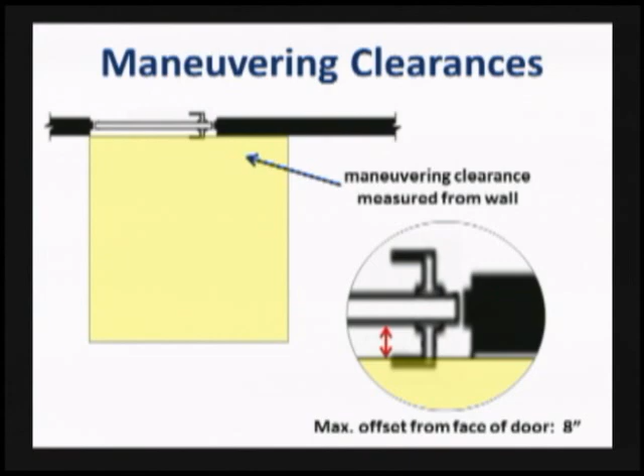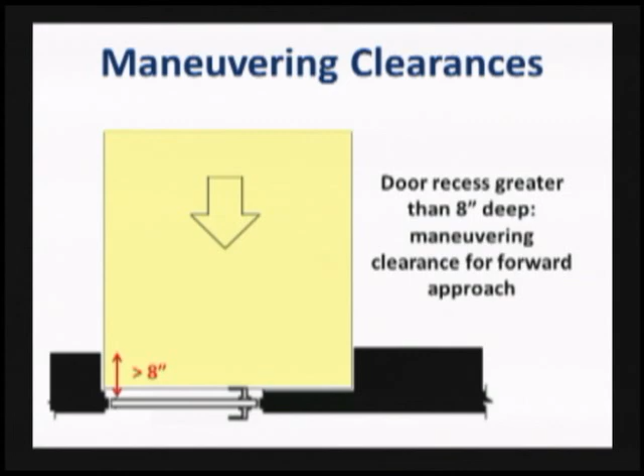And here's the example: doors recessed greater than 8 inches deep, maneuvering clearance for a forward approach. Remember, with a block wall you can make it work—you do block and brick, and depending on where you put the frame, you could have a problem. So again, that depth right there, 8 inches maximum. If you do that, then you've got to recess it and put it all back in there.